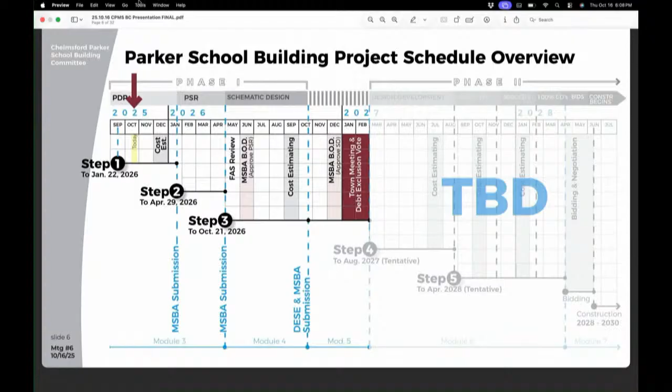So we'll start off tonight with a brief schedule overview. We had mentioned at the last meeting that we like to start with our overall schedule to track progress. We're right where that large arrow is in October, working towards development of conceptual options and space summaries, tracking towards a cost estimating exercise this December, ultimately leading to the PDP submission in January. You'll see the Phase 2 section is designated as to be determined, assuming that following a project funding appropriation, we would move into Phase 2.

Looking specifically at the PDP Step 1, we also showed this slide last meeting, but you'll see a lot more has been initiated, a lot of activities. We will report on many that have been initiated in tonight's presentation, such as the visioning sessions and our investigation activities.

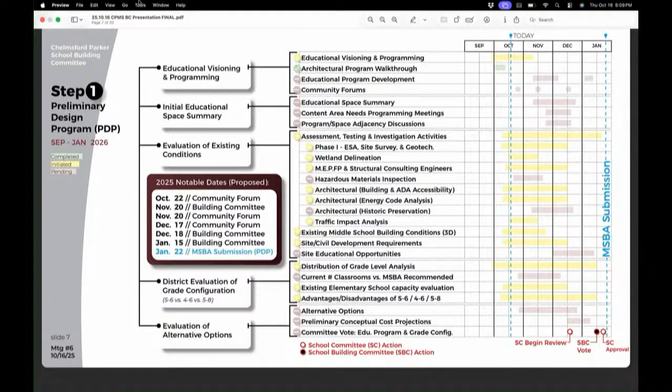One takeaway from the last time we met was the committee requested a clear guideline on the amount of action items, upcoming meetings, and meetings when decisions have to be made. So we've assembled this calendar version to show that tonight's building committee meeting will look at some evaluation criteria as we move into our initial options, getting feedback on that. Next meeting, we'll be looking at grade reconfiguration, some iterations of options. Neither of those necessarily require any immediate action items.

Where we start to address some action items would be, from AI3's point, in December we'll be submitting the conceptual options out for cost estimating, so having that additional cost information will inform your decisions in January. In the same month, we'll be looking for the district to have completed the educational program—that's the document the MSBA will learn your learning intentions through. That will be the guideline for establishing the district's educational goals for each enrollment option.

And then the real decision-making will happen in January. Once you're confident in all the information we've collected—the options we've assembled, the enrollment information—we'll be looking for the committee to make a selection of the enrollment option on January 15th, and additionally be confident in approving the PDP submission to the MSBA at that same meeting. There will also be times where we attend school committee meetings to make sure they're informed of the process and feel confident in endorsing the educational program.

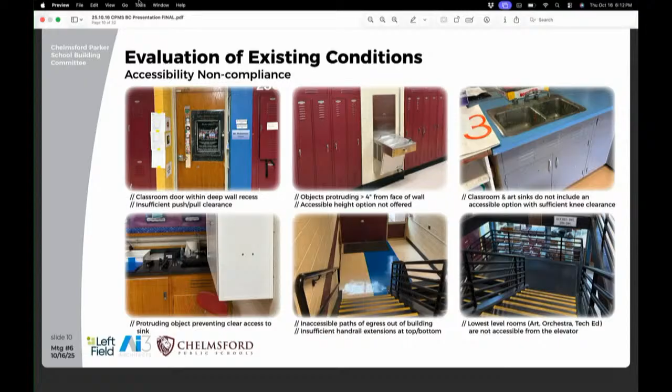Similarly, building code infractions - the railings had a lot of non-compliance issues in terms of that ladder effect, where students could technically climb up it. The components of the railings are spaced too far apart. In some cases, the egress widths of doorways wouldn't be wide enough given the occupancy load and the egress from those spaces, and rooms you'd have to pass through to exit or access the building aren't necessarily code compliant.

There's also interior and exterior ramps that exceed the allowable slope, and numerous other items that will all be documented in our reports.

The energy code as well - Chelmsford is a stretch code community. Although even if you were just bringing the building to the base repair option, you would still have to bring it up to the base energy code. One of the biggest infractions in terms of the base energy code for the existing building would just be its lack of insulation at the exterior envelope in general.

They actually, in the 60s, had a pretty inventive exterior design - one of those kind of pseudo-brutalist buildings with a lot of concrete profiles, which makes for a really interesting look from the outside. Unfortunately, those concrete profiles are really just transferring that outside temperature right on into the building. So without any insulation, without a vapor barrier, I would guess that in the late spring or summer, it probably gets kind of moist in there.

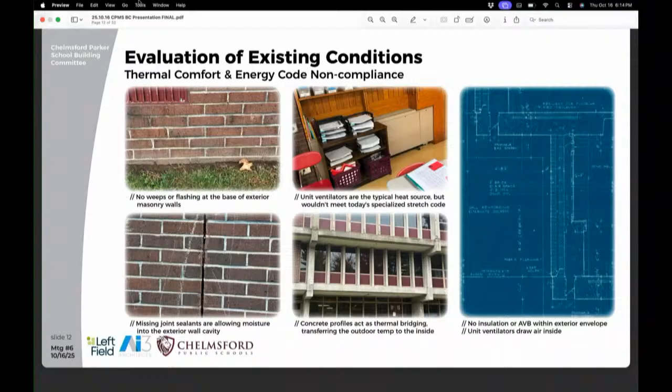That would be something that you'd want to address in a base repair code upgrade option.

We have one more slide on what we're calling general building design flaws that could be an encumbrance to learning. For example, there isn't any acoustical insulation between classroom walls or classroom to corridor walls, so it might sound kind of echoey at times. There are also a few rooms that have conduit posts or columns running within the center of the learning space, which isn't ideal.

There's just general aging and cracking of the surfaces. We definitely commend facilities on maintaining the buildings themselves, but with things like a lack of expansion joints and control joints, those materials are just going to push against each other over time and ultimately crack.

Even something that stuck out to us was just the mashup of interior finishes in the building - not necessarily something that isn't code compliant, but just a design choice for sure, with the concrete and the wood and the painted CMU. It's definitely an eclectic collection of materials.

And then, of course, we've heard too, one of the first descriptions of the space is just how dark it is. Again, nothing that's not code compliant, but it doesn't make for the most pleasant learning environment.

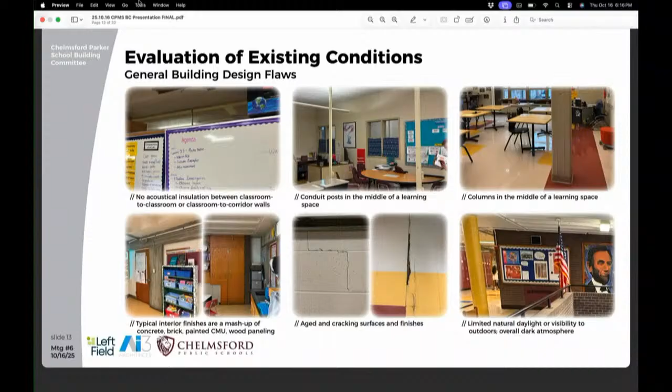Looking out to the site, we have been working with the geotechnical engineers to establish an initial proposed boring site plan. The borings are necessary because the soil samples taken from the borings will ultimately inform a foundation design for a building project. The geotechnical engineer, in conjunction with AI3, has located some initial borings.

This is in draft form, so we're still looking to get feedback from the district and DPW in terms of whether these are practical enough boring locations, or if they're in the way of any sporting events or anything that's going on. We do have some flexibility in shifting those around.

So we'll continue to finalize the plan, and at this point the actual boring is scheduled to take place October 27th. That would require a rig on site digging small holes down a certain depth, and then they'll pull those samples out and have them tested.

What was the date of that again? October 27th. And that was four days of borings, right? That's right, yep.

We typically have representatives from the district meet with our geotech engineers on site. So when the rig drops on site, there's a dialogue, there's some movement of some of the boring locations based on, like Julie was saying, whether it's moving just outside of an infield or moving just to avoid some disruption to a location in a parking area.

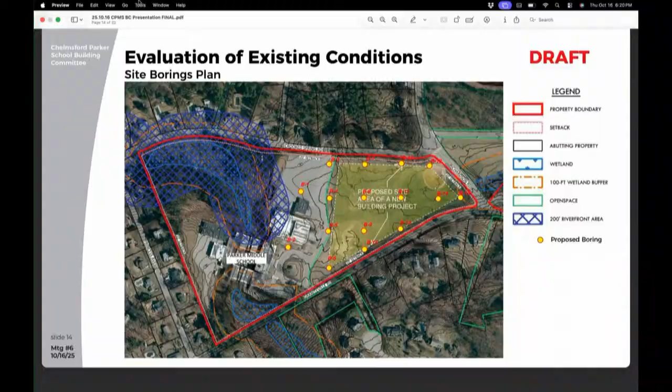10/27, I think we can make it work, but 11/4 is a full day of no school. We can shift if there's flexibility on those days. I don't know if we'll have kids at the school, because it's a full day, I know it's probably reserved for election day, but there's really nothing going on at the Parker School.

It's a professional development day, so staff would be there. Oh, so we still have staff at that building that day, because sometimes you have different schedules. Yeah, I'd have to check the schedule to see who's doing what those days.

How early do the borings start and how late do they go, in terms of the time of day? I could find out, I would think it would be within business hours. The early part of the day probably wouldn't work just because of the school starting, but could we try, since I know we need to get the borings up near the school, to do those the last part of the day on each of the 4 days?

I know they've got to move the truck around a little bit, but at least if school's out at 3 o'clock, it wouldn't be quite as disruptive to have the borings happening from 3 to 5. Sure, right? Yeah, I'll certainly make the inquiry.

But they wouldn't be there till 5, I guess it depends when practice starts. If they started earlier, that would be an impact. Are they trying to start earlier because of the light? I think they were struggling, starting at 5:30. So if the rig is out of there, are they parking the rig on site during the day? Sometimes they leave it on site, so we want to have a space where it can sit for the 4 days.

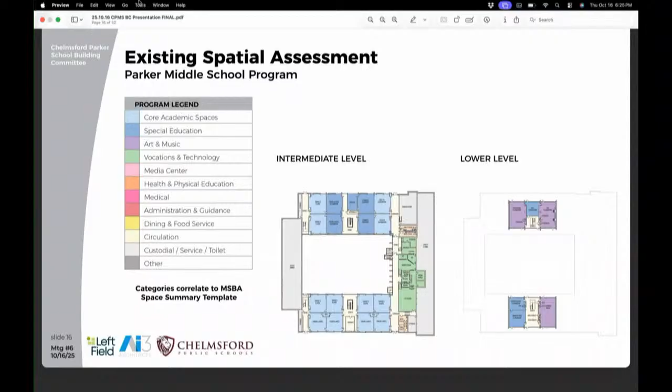By our next meeting, we'll also be able to share an analysis based on the MSBA space guidelines versus your existing building, and be able to show which learning spaces the MSBA would consider undersized.

This week we also had our visioning sessions, another one of our visioning sessions. The first visioning session in September was the core leadership group, specific to identifying some goals and norms of the district. The outcomes were that the group was able to generate 6 goals, which center around embracing every learner, collaboration, creating a safe environment, fostering growth, supporting the whole child, and honoring the community.

Then in our second session, open to a larger group of students and staff, run by our educational program consultant, Mike Prolo, the outcomes were that groups were able to focus on all the age groups considered for the various enrollment options, get a better understanding of the traits and developmental stages of each of those students, and that background knowledge would help inform any future discussions on the benefits, advantages, or disadvantages of the enrollment options.

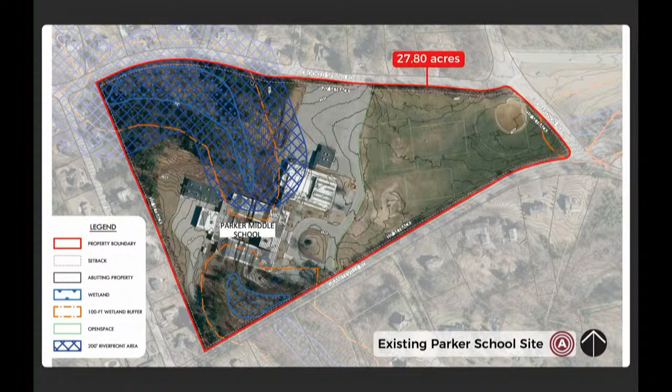So the first is the existing Parker School site, and we have the site constraints diagram. You're seeing that there are wetlands on site and the riverfront area. That's no surprise, being that there is the existing stream that runs through the building. And with any wetland, that does require a 100-foot buffer. So the orange line here is a buffer that does not allow any kind of construction within it. Additionally, the 200-foot riverfront area just extends that, so no building can occur within this cross-hatched blue area. Then the outline of the existing building, and you can see there is relatively flat topography at the fields, and then it starts to drop off as you get towards the woods.

Looking at that site, and identifying buildable versus non-buildable area: everything in that dark red we would consider non-buildable, given that the existing building is there, there's the wetland constraints, there's the topography constraints. However, the open buildable area is definitely suitable to fit a project.

So what we're showing here as just a test fit is the approximate size of the new building for the largest option - a grade 5 to 8 option, which would result in the greatest square footage. This test fit is showing just the outline of, we'll say, a 300,000 square foot building that's 4 stories high. Note that there are existing fields on this site, so some fields could still be located on the site following any kind of project, especially if the existing building were no longer there, but there may have to be some studies as well for where else in the district or the town those fields get replicated.

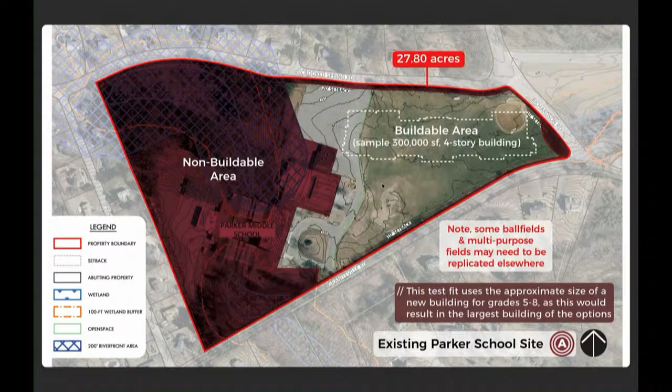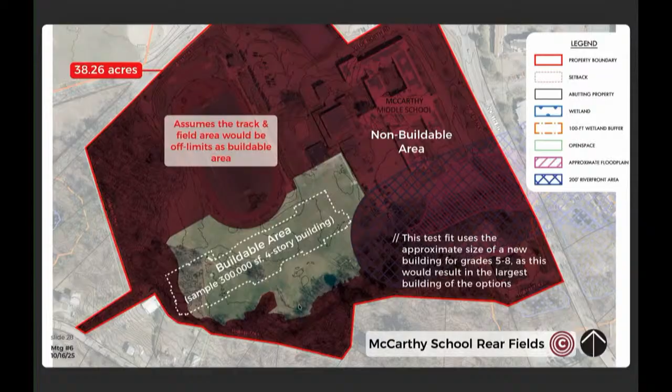The other question I have is about the replication of fields - if the expansion or relocation occurs at the Parker site or Graniteville, does that replication cost get included into the cost estimates, or how does the town or the community weigh that cost in terms of replicating those fields? Because I don't know where those fields would be replicated to. And I know MSBA won't reimburse land acquisition and so forth, but does that get baked into the cost estimates in terms of that replication cost or the loss of those fields to the community?

Yeah, it's certainly something that would need to be identified within each of the cost estimates and each option. We would work with the field to identify at least a ballpark figure of what a development cost would be for, and location, and work with you all on a location, so you're comparing apples to apples for each of the options. For sure, that would definitely be included.

I mean, as far as the existing site, those fields are used for gym too. So is it part of the curriculum site too? Yes. So I was under the impression that if, let's say, whatever was built on the existing Parker site, and then Parker came offline, when you occupy the new building, you obviously have to demolish the Parker building. And I almost kind of view that as a trade-off. So you'd open the new building, move in, then demolish the old building and probably make playable space.

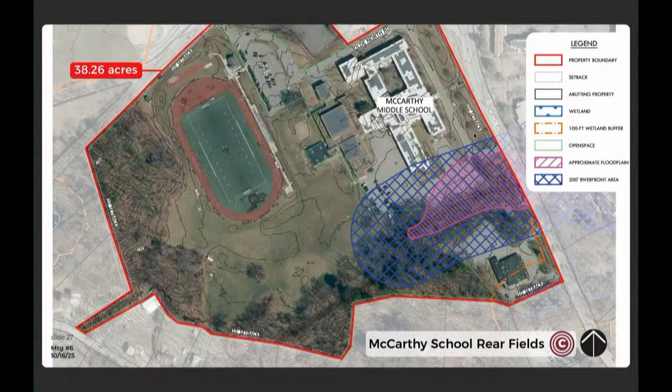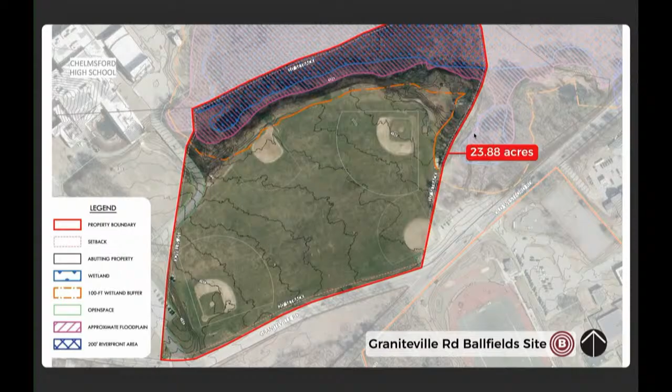But it's really just that 20 feet on the edge of Graniteville, so it has less of an impact. It's just an easement for a water main, so I don't know if it would have as large an impact, because you could probably still put a building there, but I will send those along. They're still being finalized — I think at Parker, the area that they have graded off is where the easement would fall. Maybe I gotta double check that one, I was focused on Parker or McCarthy. I'm sorry, this is Parker, right?

This is the Graniteville one, sorry. Go to the Parker one for a second, because it comes down Crooked Springs. Oh, I thought that was Crooked Spring. Yeah, we'd have to look at that — it comes down Crooked Springs, so that 20-foot setback is essentially the easement, so you're not building there anyway. So it shouldn't have — but I guess that's something.

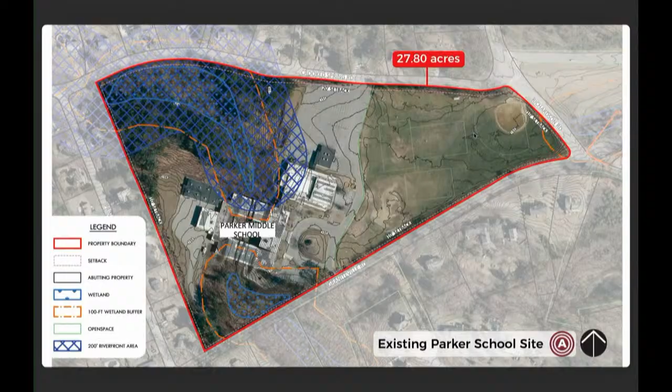Town GIS? No, we're just finalizing the easement with the water district right now. But I will send those plans too, because maybe it's like a permitting and easement coordination category, because that is potentially, I think, more problematic for the McCarthy site. You can probably still fit in a building, because it's a water main, but...

Yeah, sort of a site development restrictions category, which is a component of the PDP that will be reported on too. So I'll send that helpful information along. They're just being finalized, they're just not stamped yet, so it should be by next week and I'll send them along.

Anything else? Anything else under upcoming events and activities? We're good with the meetings. I don't see any of the general public here, so I don't expect there's any public comment this evening. Is there anything else before I ask for a motion to adjourn?